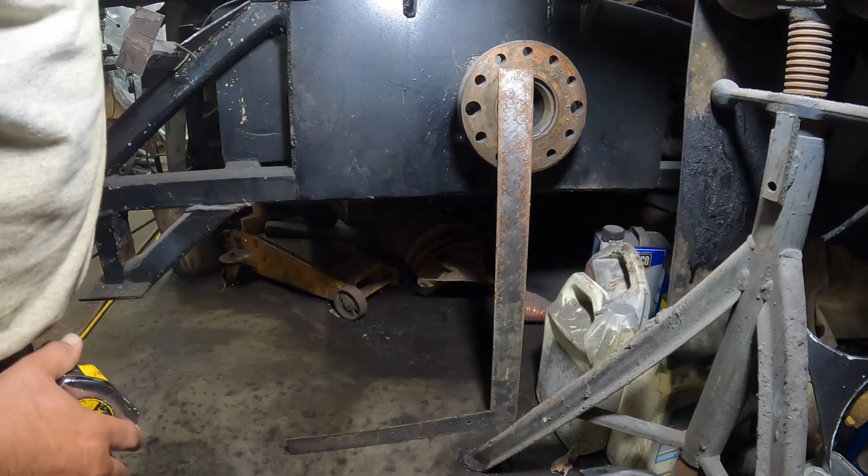Okay, what I've got here, this is the chassis off of the '48 Ford Arc Force. It's handmade, square tubing, ladder bar frame that I had made. And it's got a Rockwell axle in it that has been modified and narrowed.

Measurements from center of axle to back of the stabilizer plate. This plate, you have to follow rules. This plate has to be 4 by 5 inches or something like that - I ended up making mine 5 by 5. And this has to be within so many inches of the back of the tire, and I think that's about where it's at. It's right there - center of this is probably 2 inches when the tire comes around.

And if this stabilizer bar is right behind the wheel, it can't be more than 6 inches off the ground. And if it's not within tread of the wheel, the maximum is 10. Now I've got this up on jack stands so the tires could come off, and I think I set mine at 8 because it's outside of wheel tread.

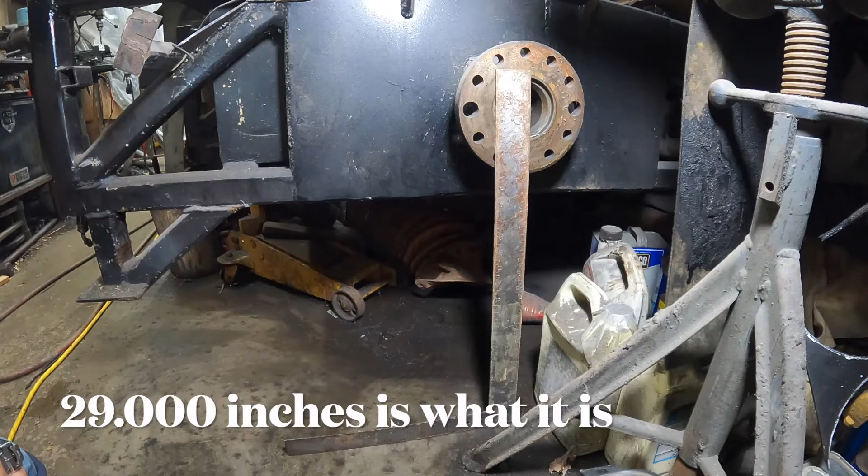But now this is what they don't tell you. Well, they tell you it has to be 2 inches behind the wheel. So to get this math, what I'm talking about, let's say we'll say 29 inches, because this is going to dig down into the ground quite a bit. But we'll go 29 inches from there and 8 inches up.

And then we're going to find that angle. And then that angle is going to determine how far off the ground the nose is going to be. And you don't want it that tall, but you're going to lose a lot of traction once that wheelie bar or this stabilizer bar hits the ground. It starts lifting the wheels off the ground, and you lose a lot of downward force.

So we always like going to the rules, take them as far as you can, and that's the reason their safety is there to keep us safe, but yet we still want to be competitive.

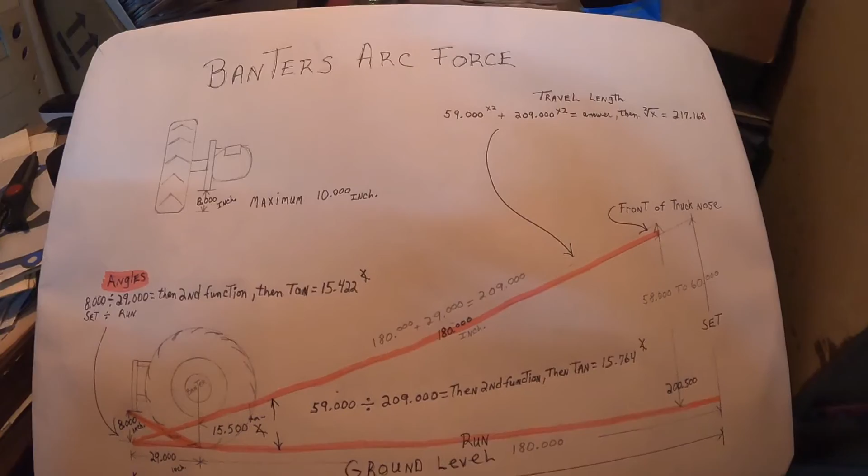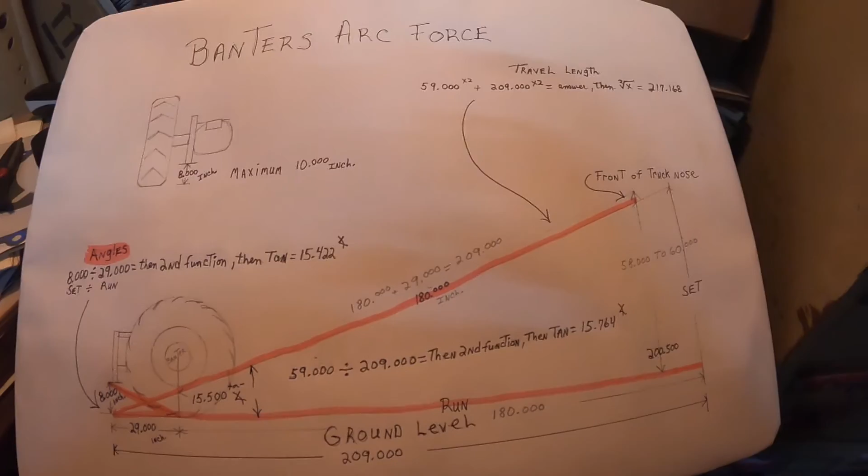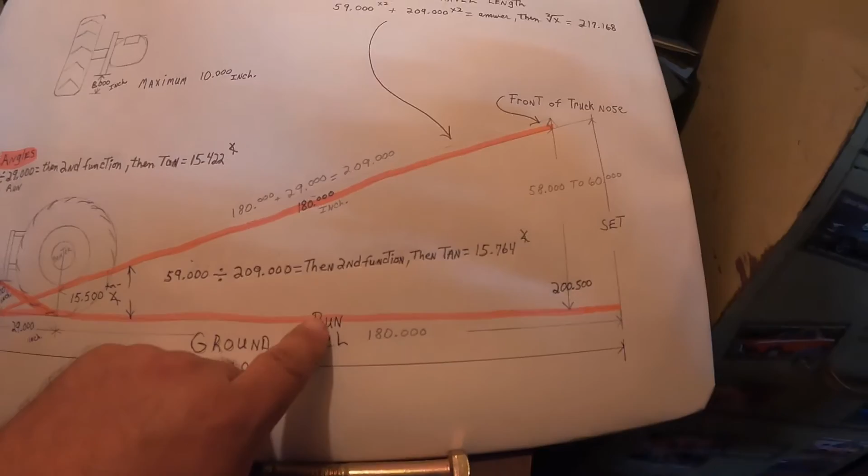Okay, what I have here is a draft of what I just showed you on the back of the chassis of the pull truck. And what I've got here is length, which we're going to call run. And then I've got set. Now these are different - this is how I use it. Your math teacher may call this opposite and this adjacent, but this is how it stuck with me when I learned it. So I call this set, and I call this run, and I call this travel.

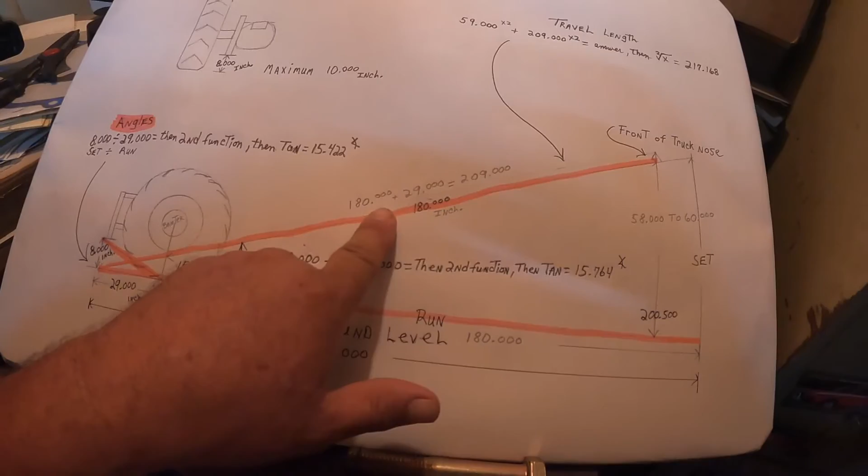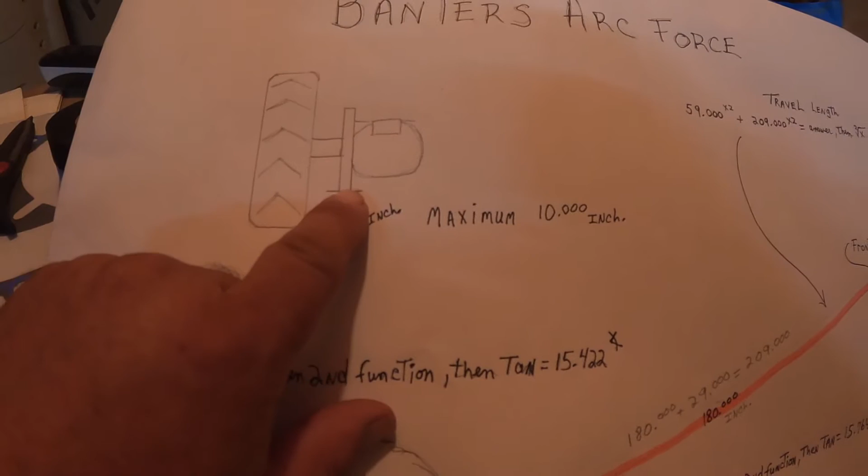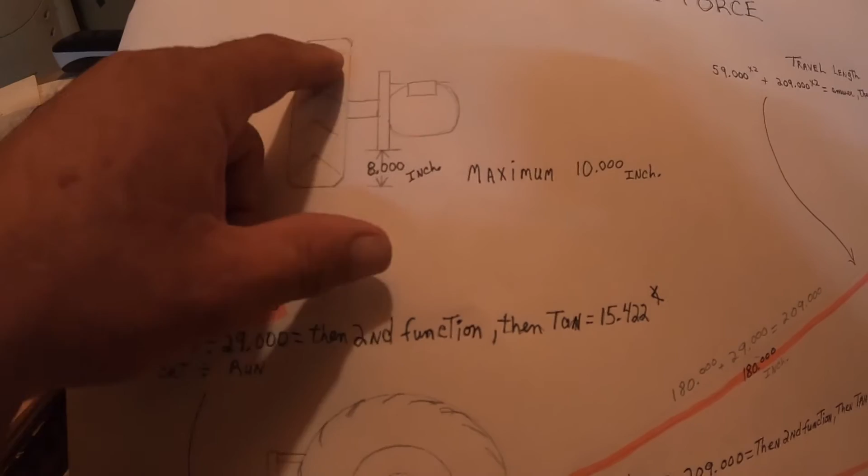And the rules ask us not to put the stabilizer bar, if it's in tread of the tire, it has to be a minimum or maximum of 6 inches high. And if it's not in line with tread and it is like where the frame is here, maximum can be 10 inches, and mine is 8.

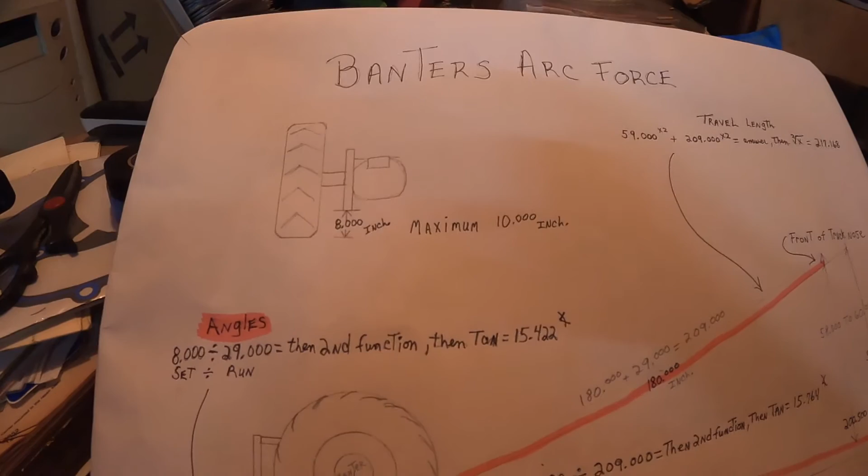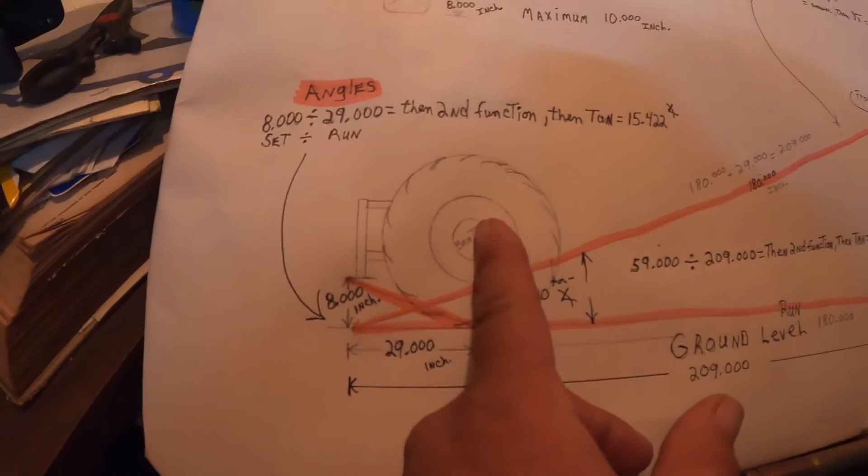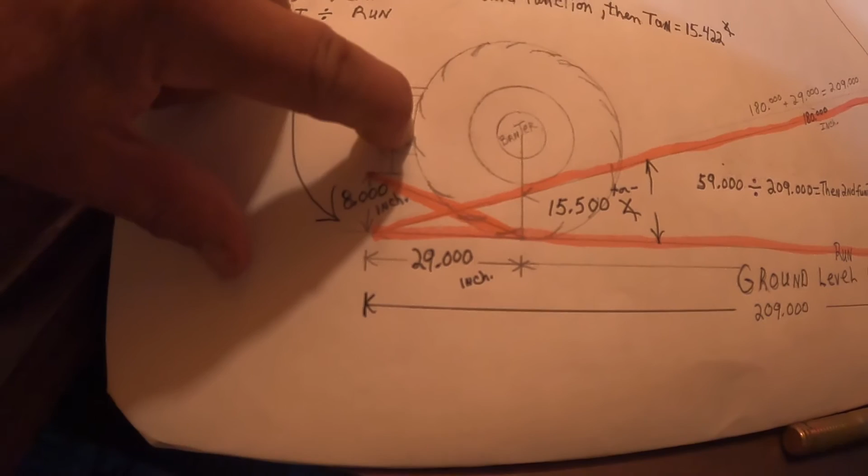And there's times I kind of wish I had a little bit more - I may change that. So what I've done here is, you don't go by center of tire, you're going to go 8 inches off the ground, and that's your set. And then center of axle down to the ground, or the bottom of the tire over, is 29 inches. And this plate has to be exactly 2 inches behind the back of this tire here - the furthest most point can't be more than 2 inches past that.

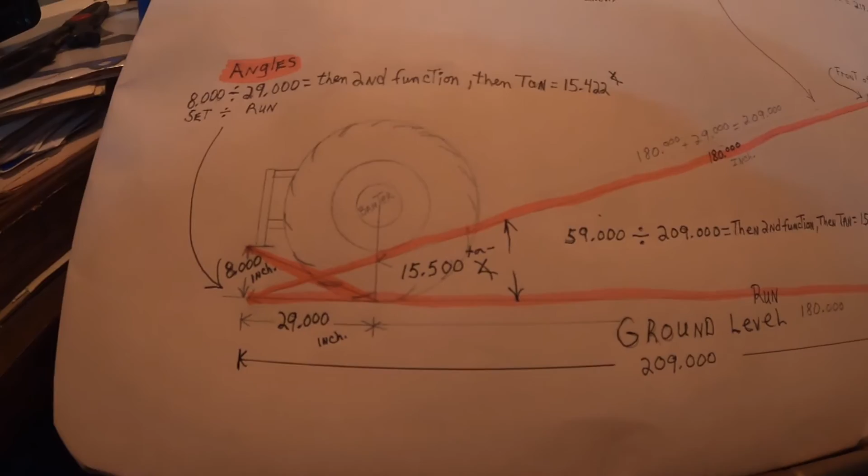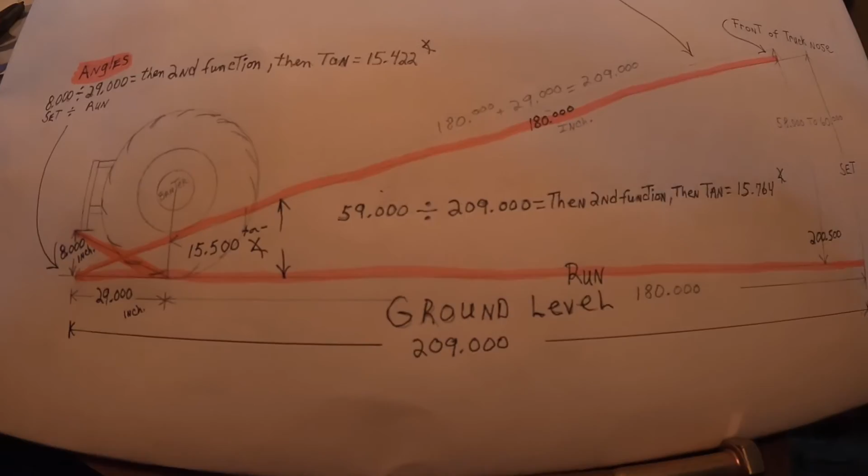So what I've got here is the angle - we want to find out what the angle is. And I kind of shuffled around back and forth to find out what height I wanted that truck to go when I first started it. And I'm just going to say 59 inches high.

Now, you realize that when this length is from here to the nose, and you go up 5 feet, it's going to shorten right here because of that angle coming up. We'll go over that formula next as soon as I explain this.

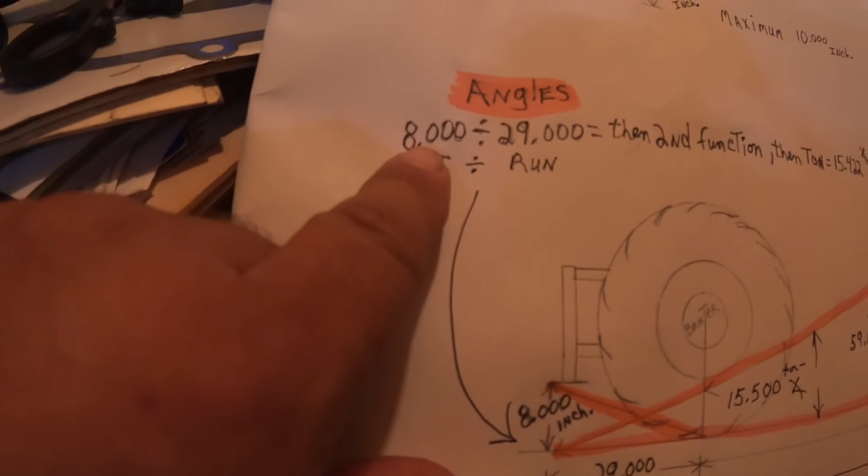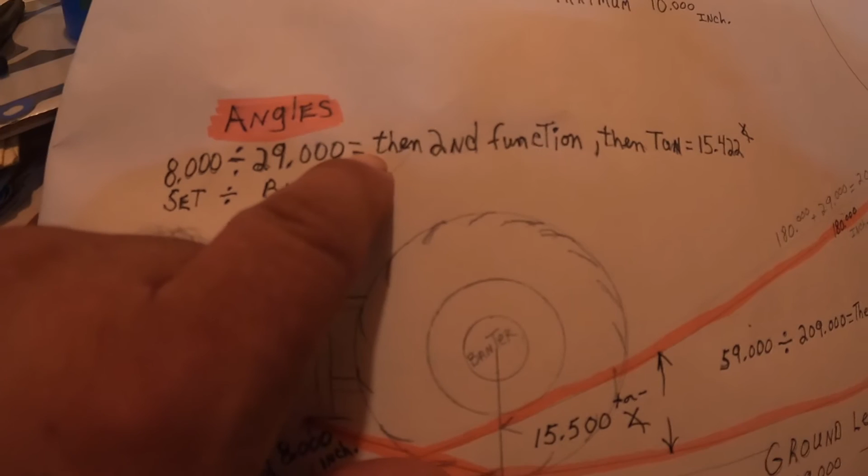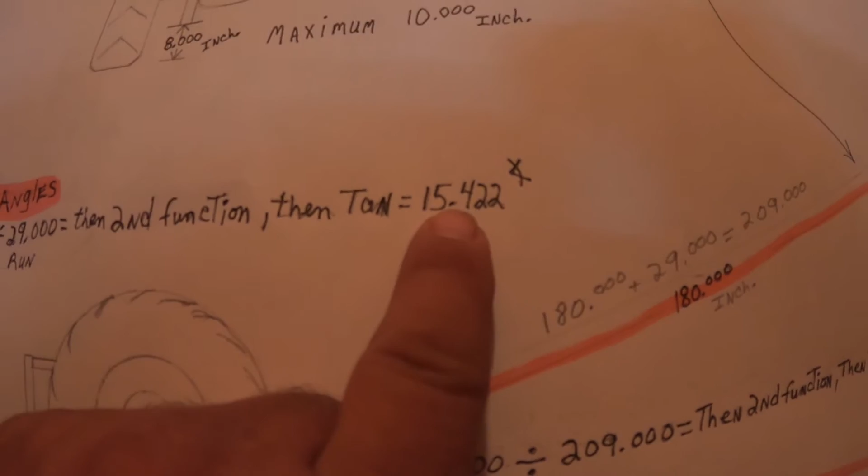So what I ended up doing is taking 8 inches. I used decimals, used the zeros, and I took 8 inches divided by 29 inches, got an answer, equals answer, then push second function, then push tangent, and that's the angle that I got at 29 inches

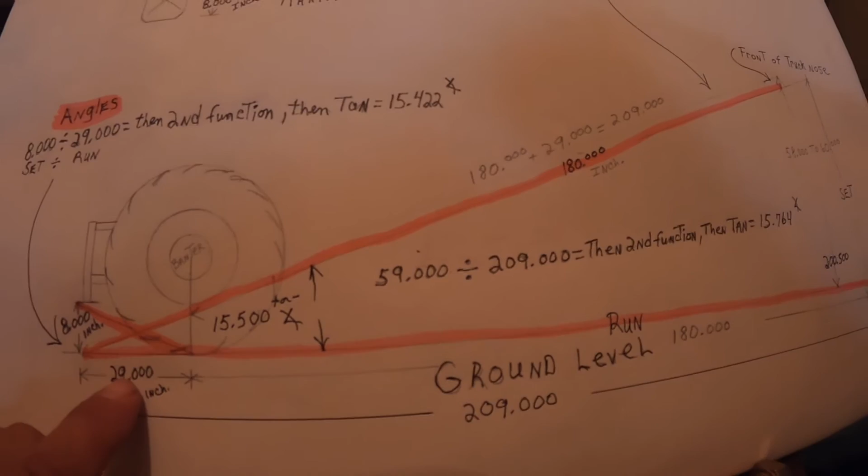of run and 8 inches of set. Now reverse that. Now we're going to go from center of axle to nose, which is 15 feet. That's what the rules are for at NTPA, at least it was in 2009. So you're going to take the 15 foot plus the 29 inches, and I get 209 inches.

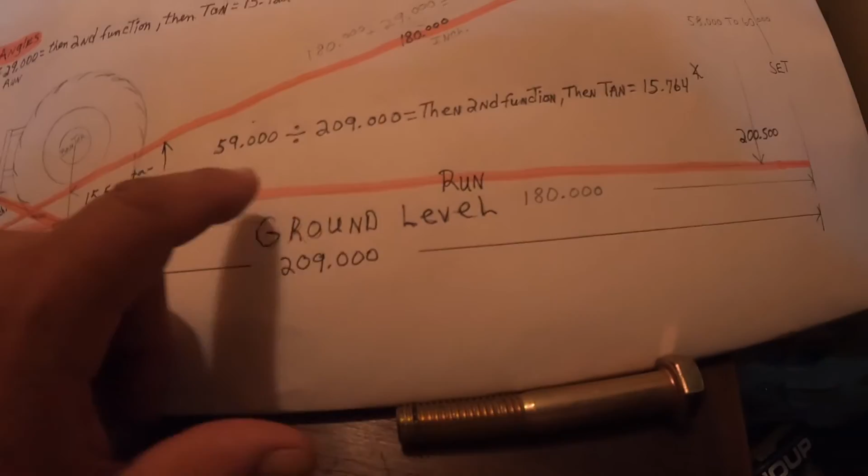So I'm going to take at 59 inches is what I want it to be. I don't want to go any higher than 58 to 60 inches. That's 5 feet. That's up there. So you take set

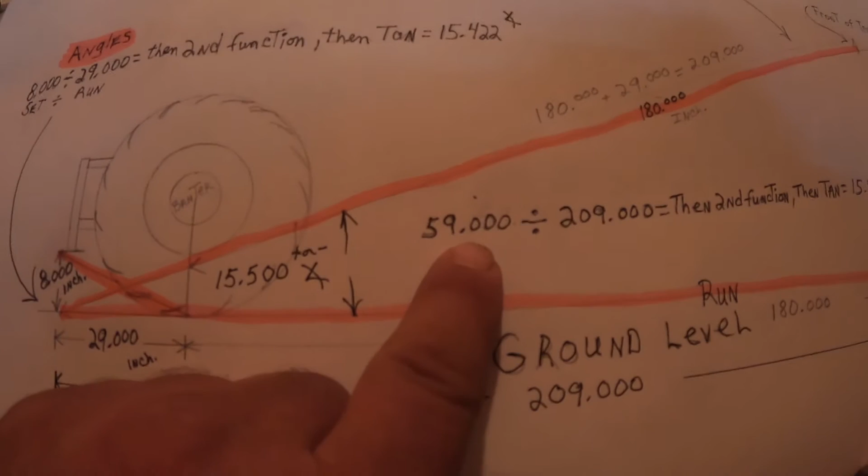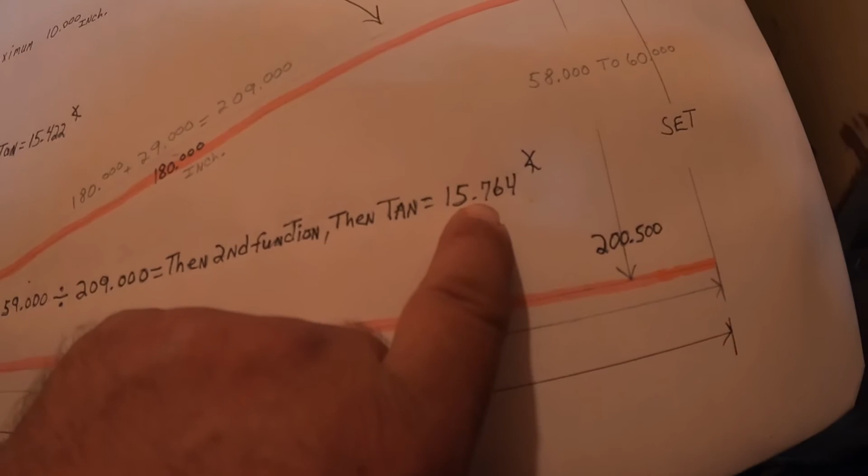first, 59 inches divided by 209 inches, and you get an answer, and then you push second function, then you push tangent, and I got 15.764, and that's close to the 15.422. So that's how I figured that out.

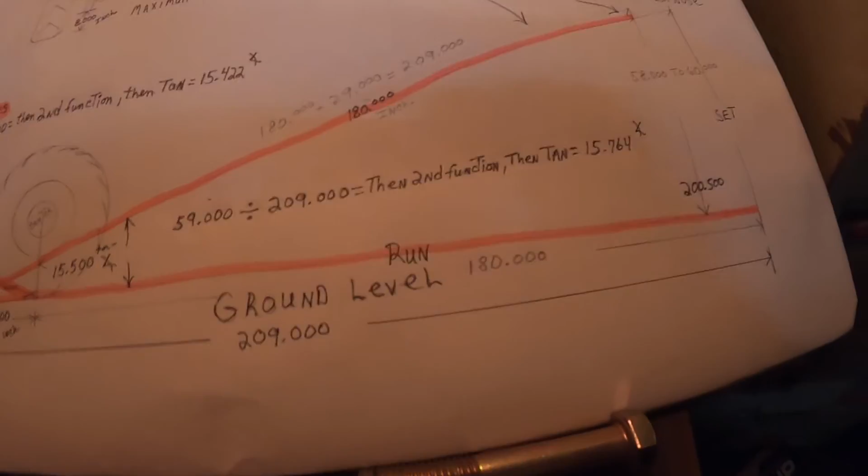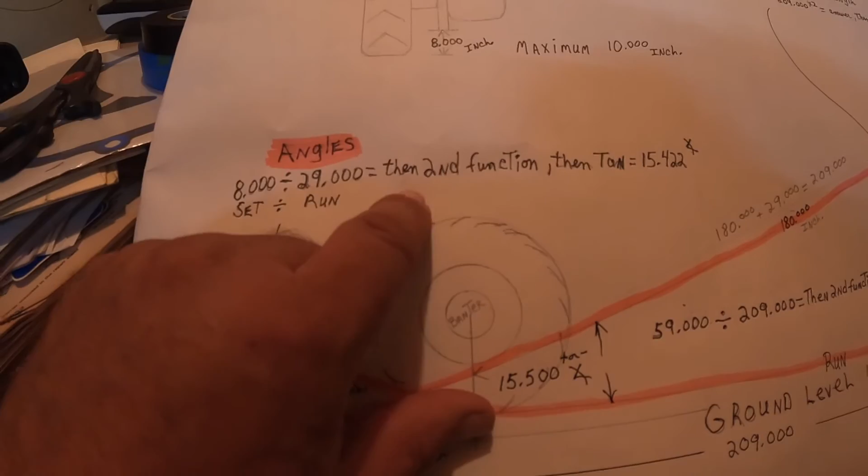So it's set divided by run, and you get an answer, and you push equals, then you push second function, then you push tangent, and that's how you're going to get your angle, taking the set and the run.

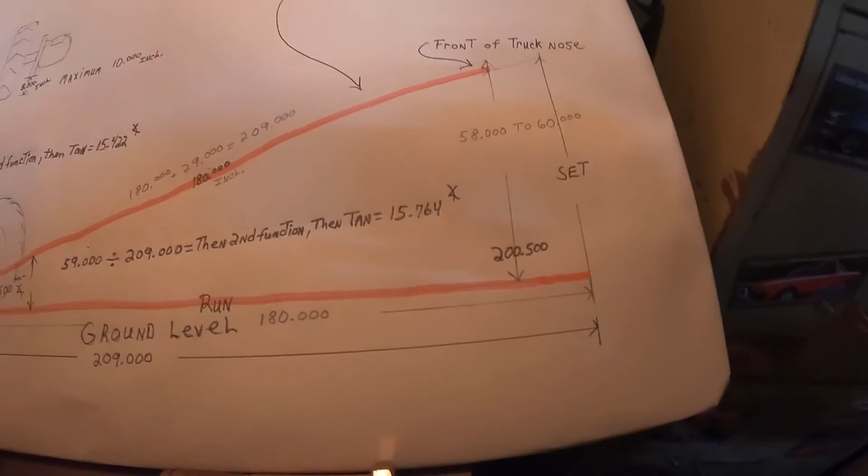Now, if you're going to build a rafter, you're going to be short right here. So you've got to figure out a different formula for this up here. We just figured out angle. Now, if you want to figure out travel length, that's a different reason why you're going to do that.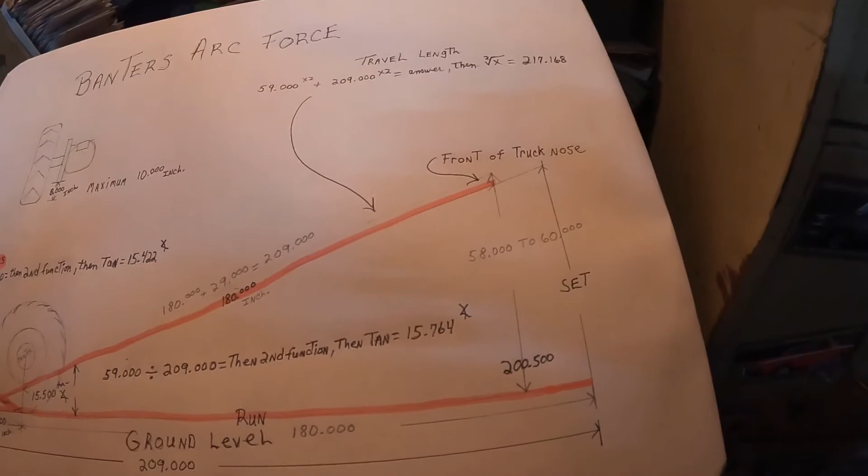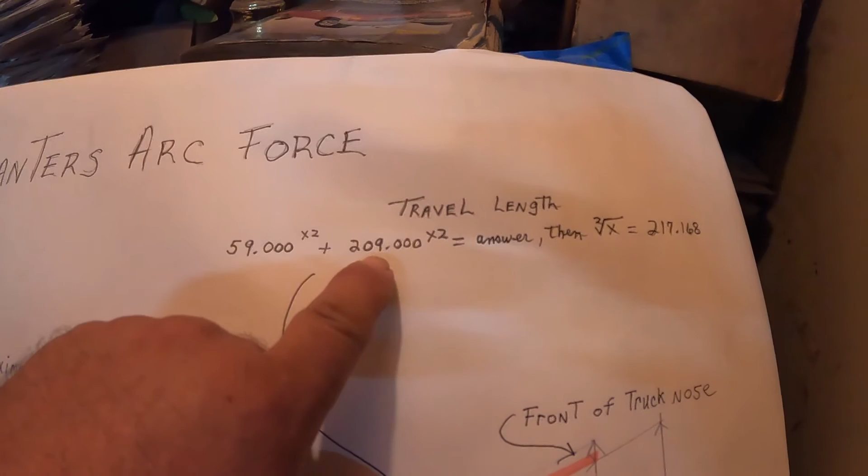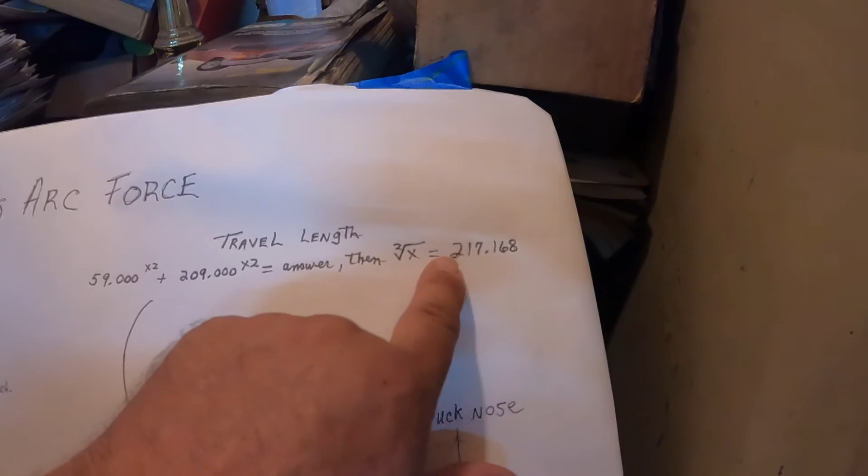So what you do there is you take set squared plus 209 inches squared equals, got your answer. Then you push this one, and you get 217 inches, 0.168, and that's what's going to push it out a little bit further so it comes out even with that run.

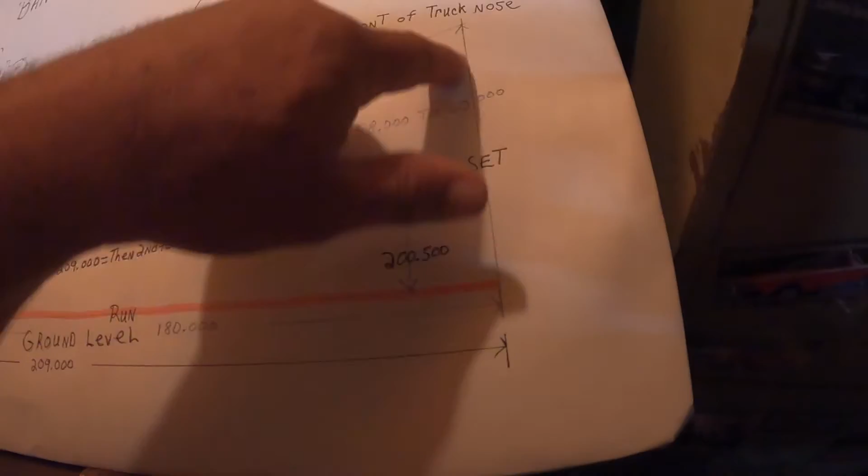If you're going to build a rafter, or if you're going to put your grain auger up on the grain bin, because it's got to go up to the center of the bin. So that's what I ended up doing, and now I want to go over it with the calculator and make sure you understand.

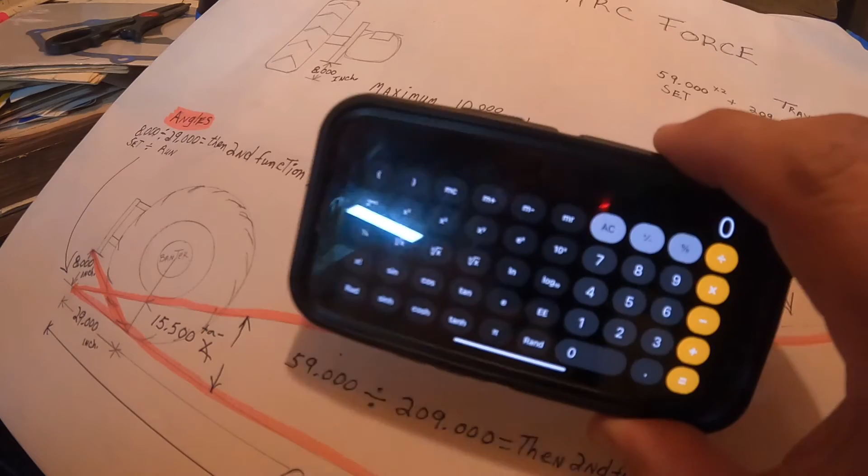Okay, to find the angle, wanting to use a formula where you're going to use the calculator. This is my phone. You flip it sideways and it does this. Always want to make sure everything's cleared real good in case one of the buttons is still holding on to the symbol.

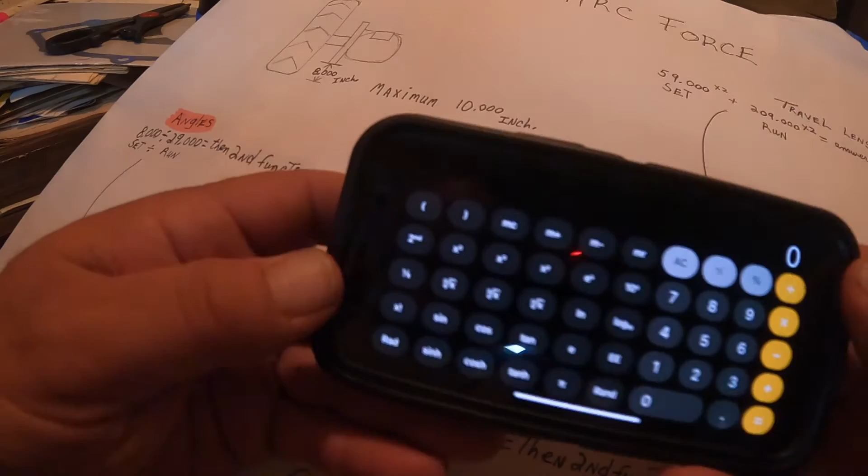But anyways, to find the angle of the truck when it's up in the air at 5 feet, so we're going to say 59 inches. So you got to do in decimal 59.000. Got to use the zeros. And you want to divide that.

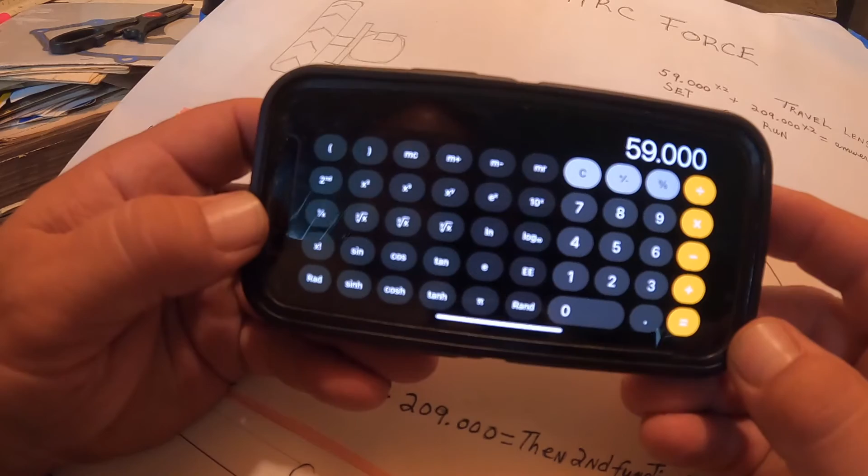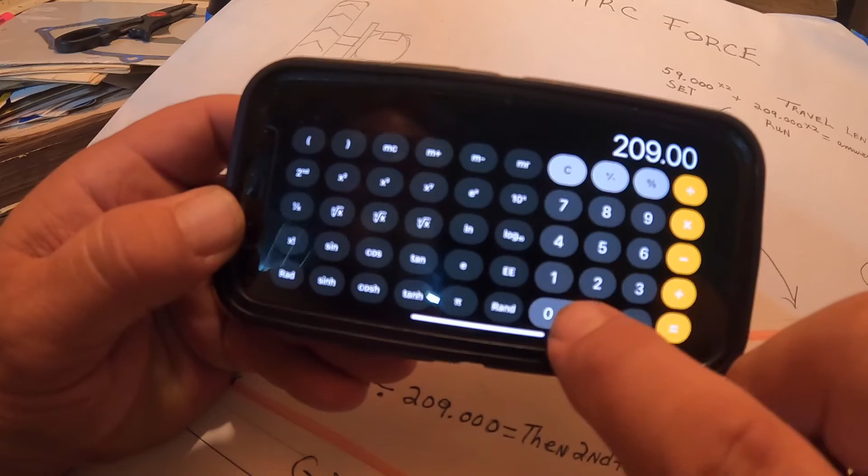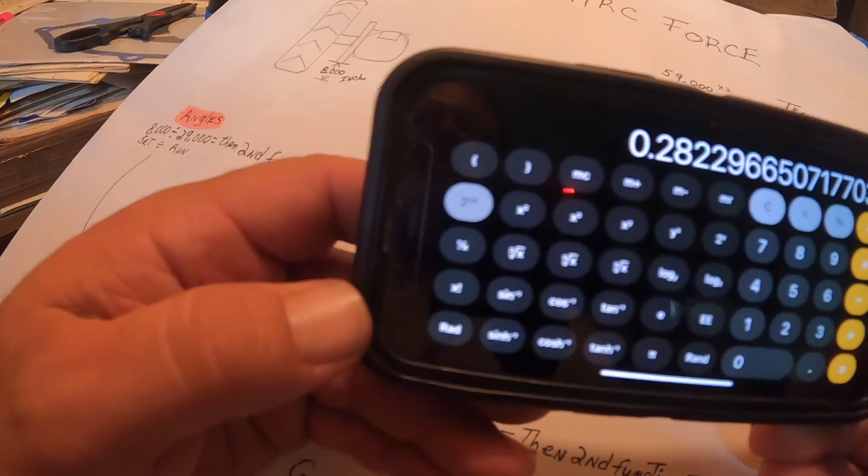This is to find angles. And then take the run. The run is 209 inches equals, then second function, this one over here, the 2nd, second function, and then you go to tangent. TAN -1, tangent. And we get 15 degrees, 0.764.

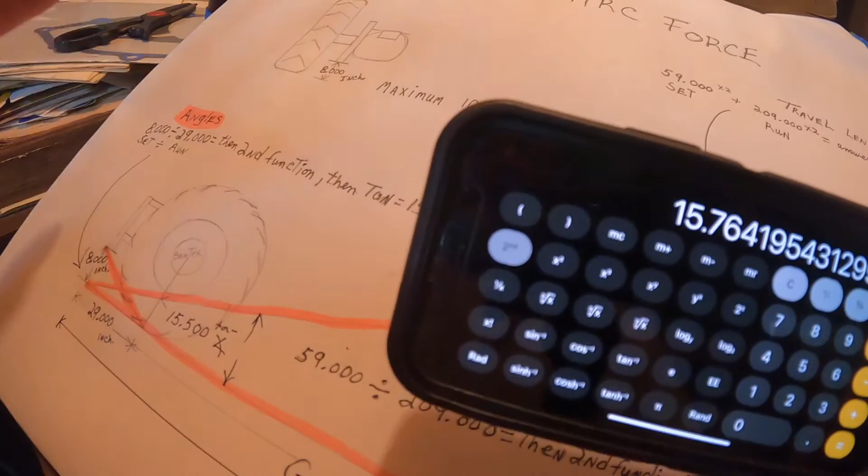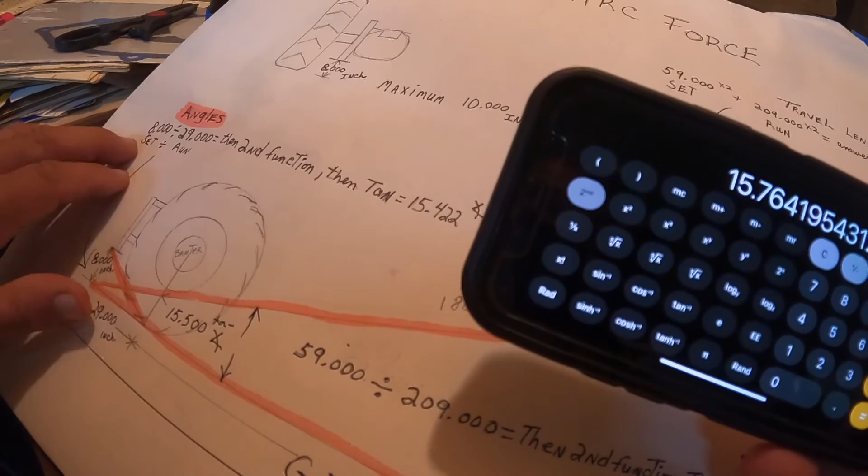Roughly, I'm guessing at 15.5. So from the back of the stabilizer bar up, it's 15.5 degrees. And that's the formula. Set divided by run equals, then push second function, then push tangent, and you get that.

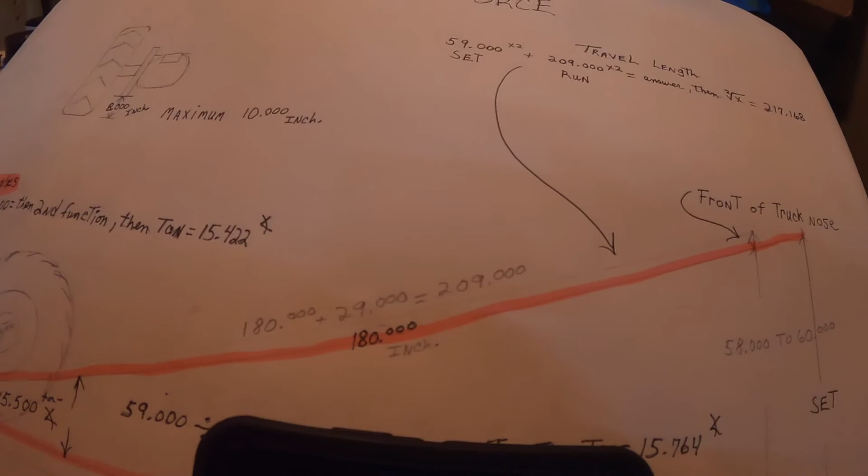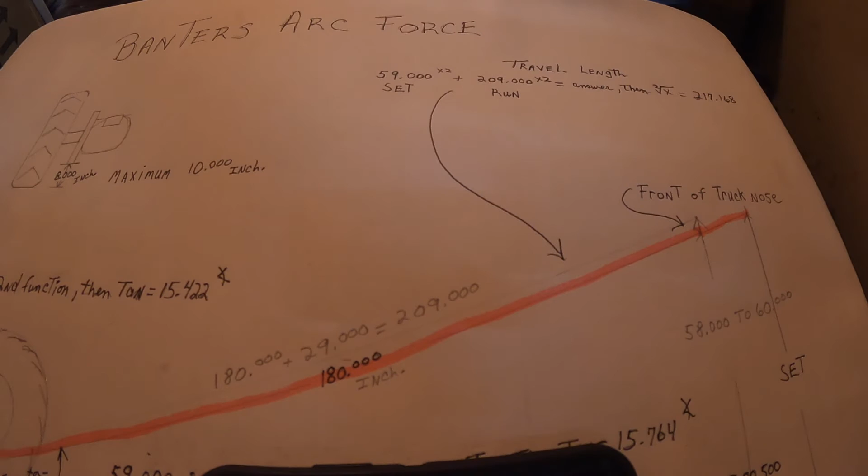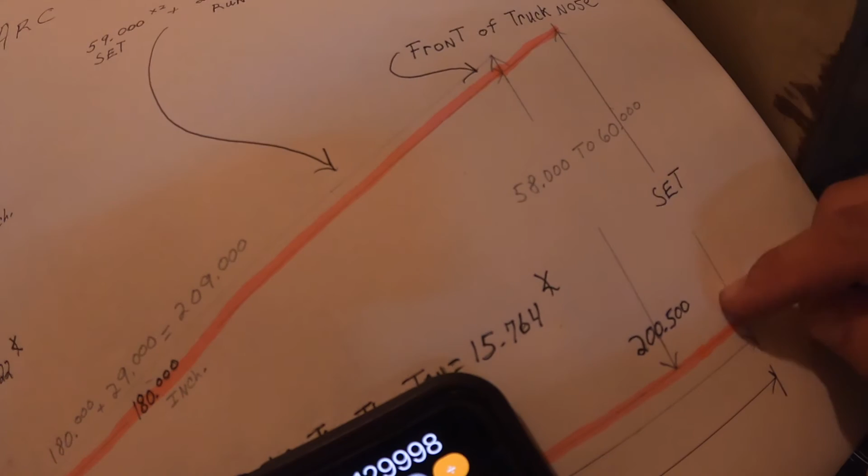Now, if you're wanting to find the travel, this length right here, because maybe you're building a gate and you want to put a cable on it, or you're trying to figure out how long of an elevator or auger you need to go into a bin, or maybe you're building rafters and you want to come out even up here from the bottom, you want to be square because the pull truck's going to lose some distance.

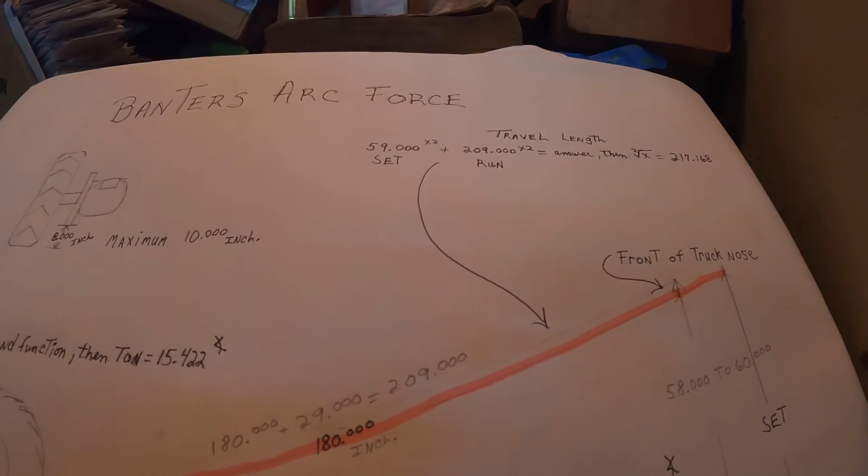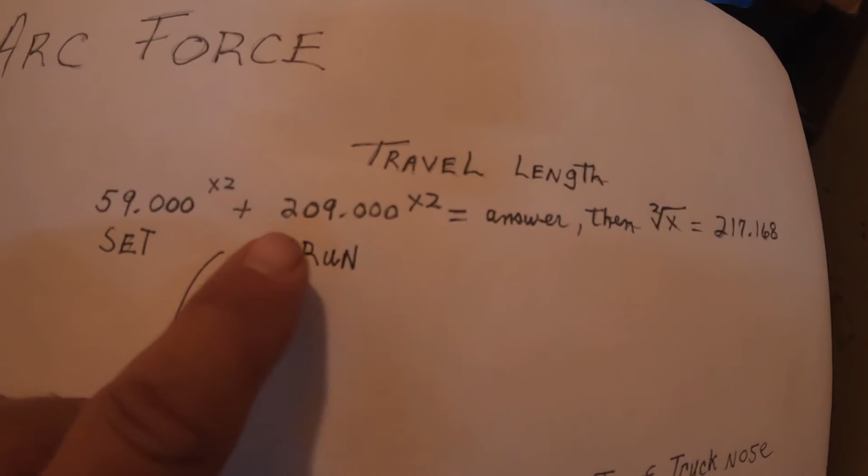So there's another formula for that, and it will be right here. It is set squared plus run squared equals, you get your answer. Then you push 2nd square root, and then you get your answer.

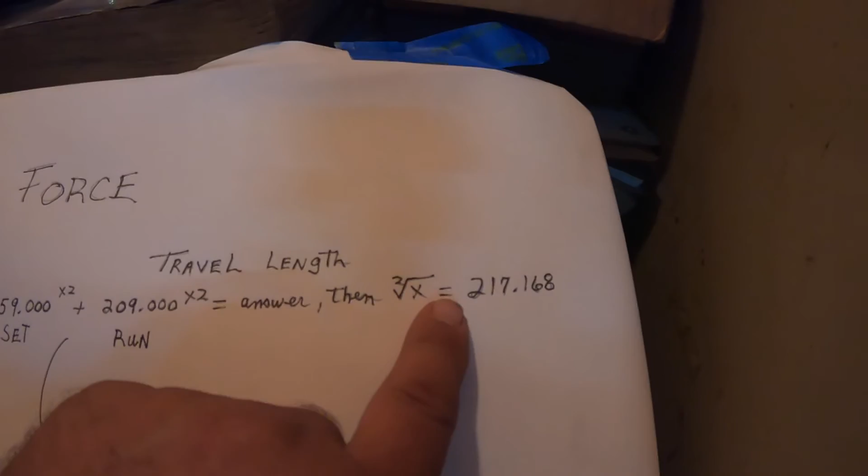217 inches of travel. So if we want to be square with the bottom to the top, you have to add to it, because you're going to lose some distance there if you go by this measurement here. If you go by this measurement here and roll it up, you're going to lose distance. So you have to add to it. That way when it comes up, it's even with the bottom.

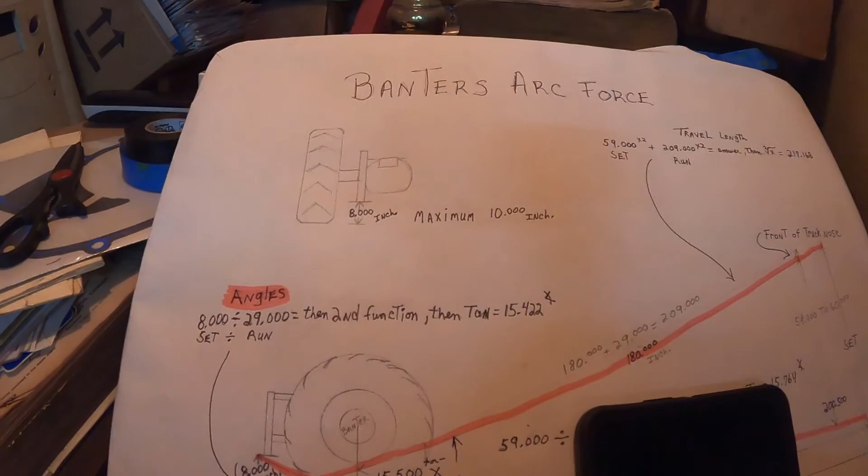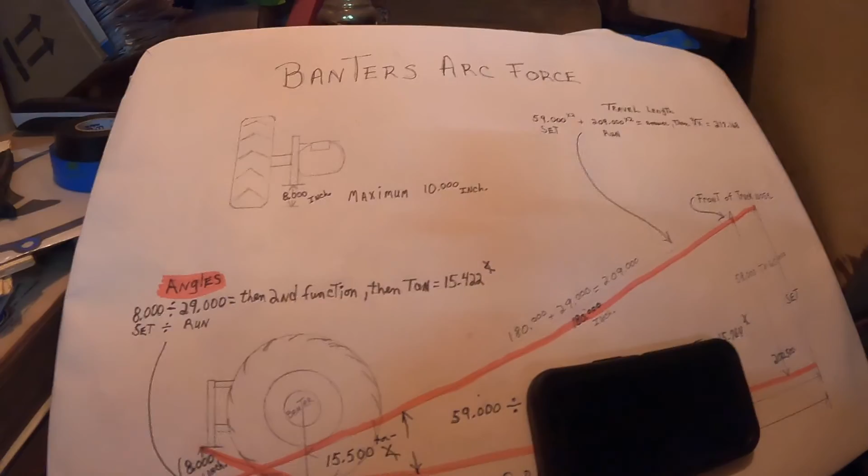So I hope this has been helpful. And it's always worked for me. And it's one of the pipe fitter things. And a building, anything, windows, anything to do with frames. It's a good formula. Two of them. Travel length and angles.